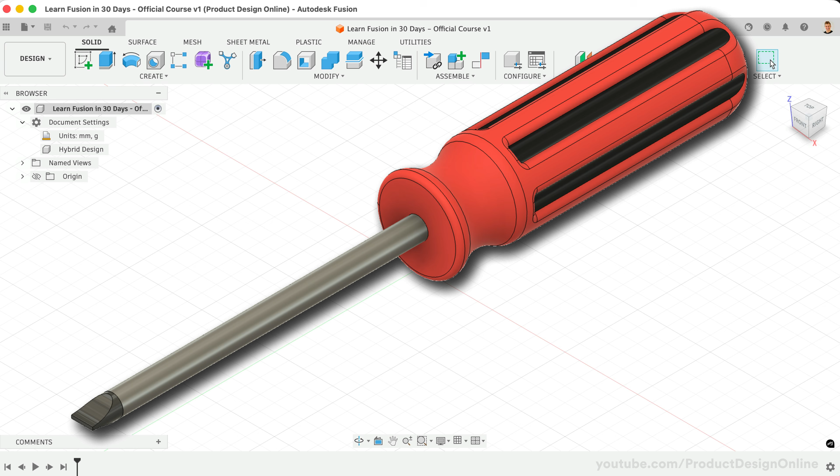Welcome to day number 12 of Learn Fusion in 30 days. Today, you'll create a flathead screwdriver as you learn the 3-point arc command, circular pattern, and more.

Let's get started. Start a new design file by choosing the hybrid design intent and save your design. Use hybrid because our screwdriver contains one part for the plastic handle and one part for the metal shank.

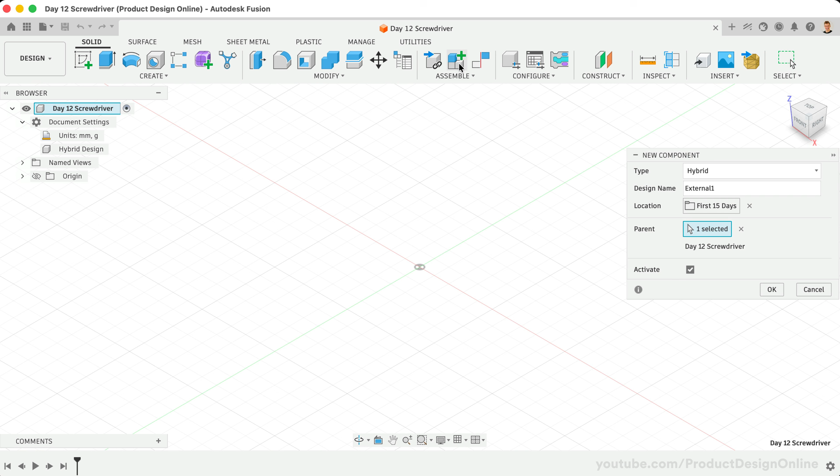Create a new component for each part. Activate New Component from the toolbar. Set the type to Part, as this represents a single manufacturable object. Stick with a standard component and ensure you uncheck External. This creates an internal component that lives only inside this hybrid design file.

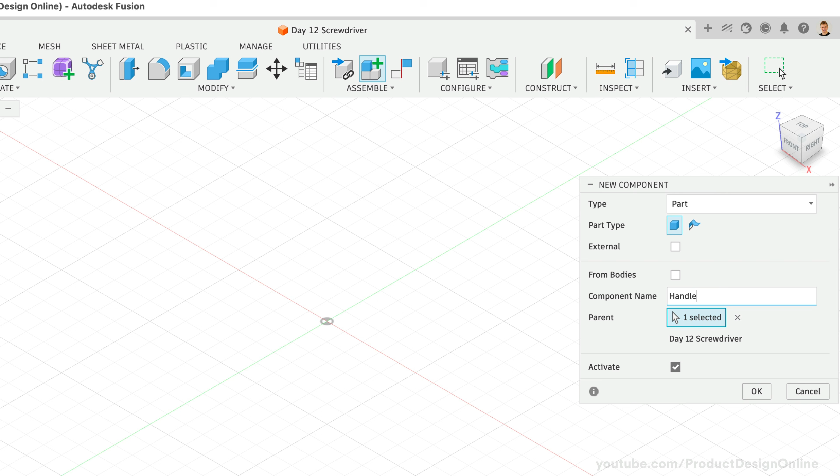Name this first component Handle and click OK. This handle component serves as a container for everything related to the handle part.

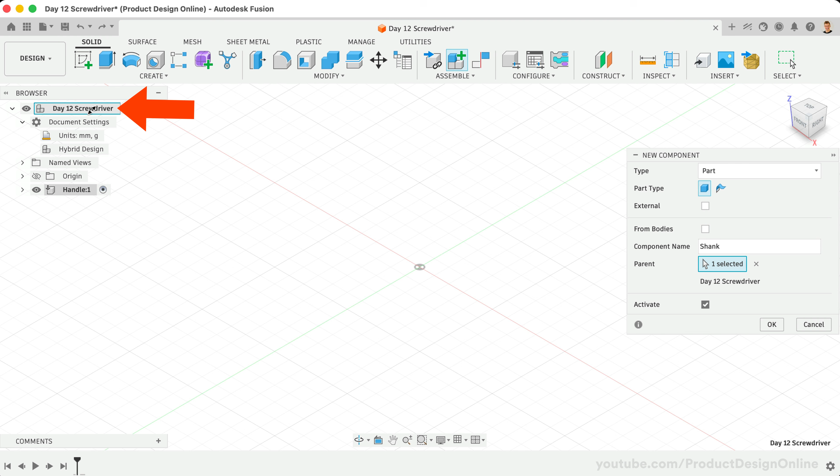Press spacebar to repeat new component and set this one to the part type as well. Name it Shank. Before you click OK, clear out the parent selector. Select the top level or root component to ensure both components are nested at the same hierarchical level in the browser.

Very important, remember to keep a close eye on which component you have active in the browser. The radio button icon next to the component name indicates the active one. Hover over the handle component and click the radio button to activate it.

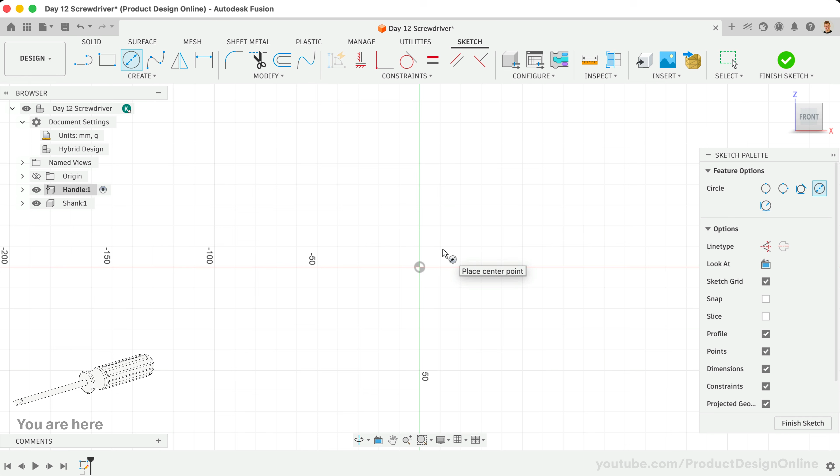Press C for circle and select the XZ origin plane to sketch the handle as if it were lying on a table. Start at the center origin and define the diameter as 28 mm before pressing Enter.

Press E to activate Extrude. Define the length of the handle as 100 mm. Click OK to save the extrude.

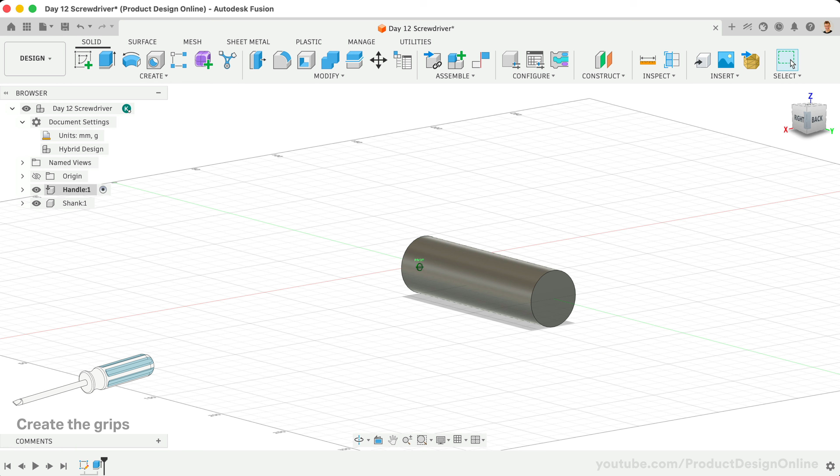To create the grip cutouts, start a new sketch on the back side of the cylinder. Rotate your model, right-click on the back face, and select Create Sketch.

Activate the Circle tool again. Start the center circle anywhere on the edge of the existing cylinder. This automatically applies a coincident constraint. Define the diameter as 6 mm and press Enter. Notice the circle stays constrained to the edge of the existing circle.

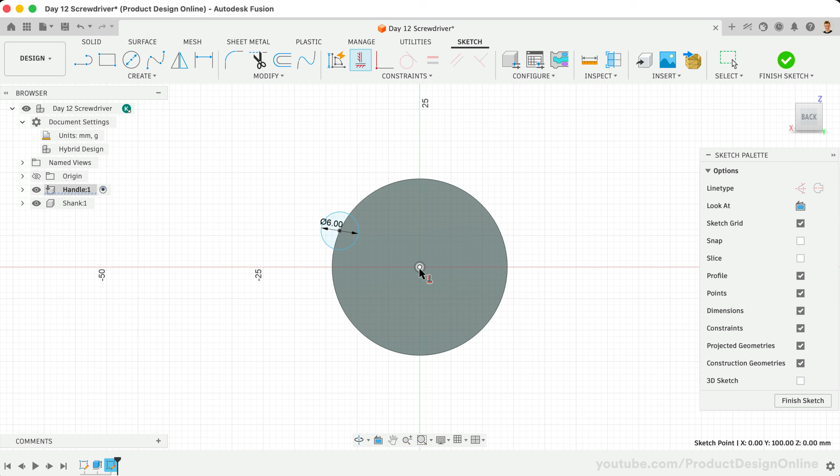Click out in space to clear any selections. Activate the horizontal constraint. Select the origin and the center of the circle. This forces it to remain in position and fully defines the sketch.

Let's cut half of the circle out of the existing cylinder. Press E to activate Extrude and select the right half of the circle. Drag the blue directional arrow into the existing 3D body to cut away material. Define the distance as -75 mm and click OK.

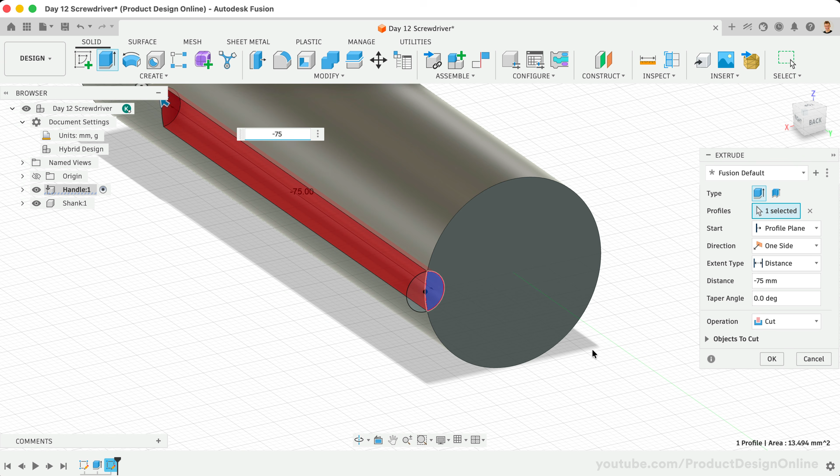This represents the first groove on the handle. As a best practice, keep your sketches simple and manageable. Pattern the feature instead of sketching 5 more circles.

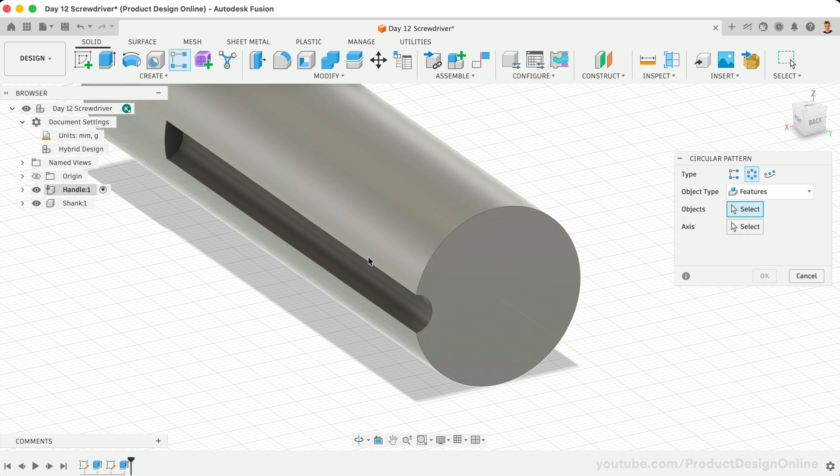Activate the rectangular pattern tool in the toolbar and switch to the circular type. Very important, be sure to activate the solid pattern tool and not the sketch pattern tool. Set the object type to features. This allows you to select the extrude in the parametric timeline as the object to pattern.

Switch to the axis selector. Because you started the handle from the center origin, you can leverage the center Y-axis that runs through the cylinder. Very important, our handle component includes its own origin. Toggle open the origin folder and select the correct Y-axis nested in this part. This ensures the part never loses reference.

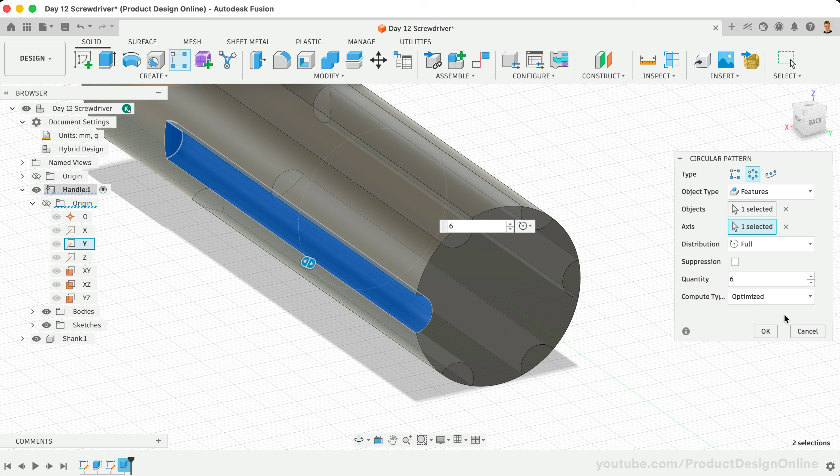Leave the distribution set to full and define the quantity as 6. Change the compute type to Optimize to ensure the fastest processing, and click OK to save it.

Before we round over the sharp edges, add the thumb rest on the front of the handle. The YZ origin plane splits the handle down the middle. Right-click on the YZ plane in the browser and select Create Sketch. This allows you to sketch the side profile and revolve it around the center axis later.

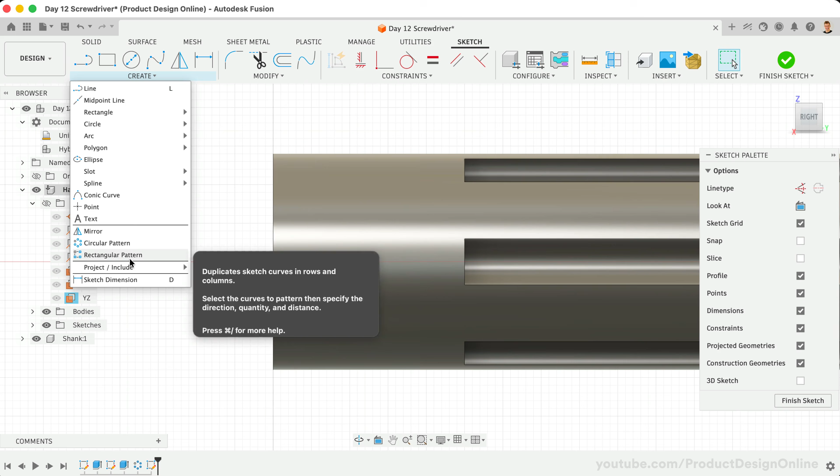To sketch the 3-point arc at the top edge, use the Intersect command first to reference the existing edge. Activate the Intersect tool.

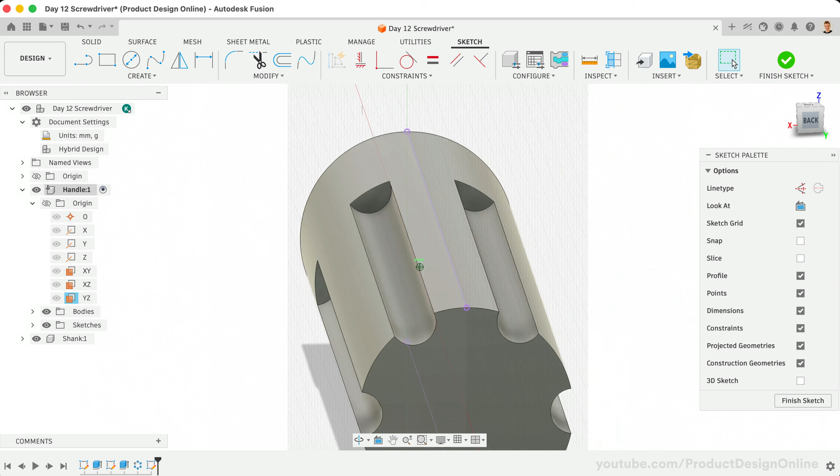Select the 3D body, ensure you check Projection Link, and click OK. Remember, this creates purple geometry where our active sketch intersects the existing 3D body. This edge will automatically adapt if you change the size of the handle.

Activate the 3-point arc command from the Create menu within the Arc flyout menu. The 3-point arc requires you to define the starting point, the end point, and the radius of the arc. Click to place the starting point anywhere on the projected line, and click again to place the end point. Click a third time to place the radius.

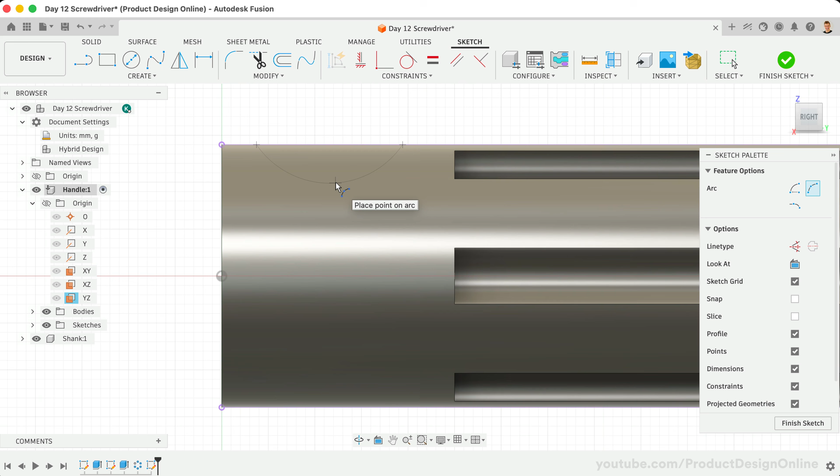Let's now activate the Sketch Dimension tool to dimension the arc. Select the corner projected edge and then the start of the arc. Click to place the dimension and define it as 3 mm. With the Dimension tool still active, select the arc and define the radius as 13 mm.

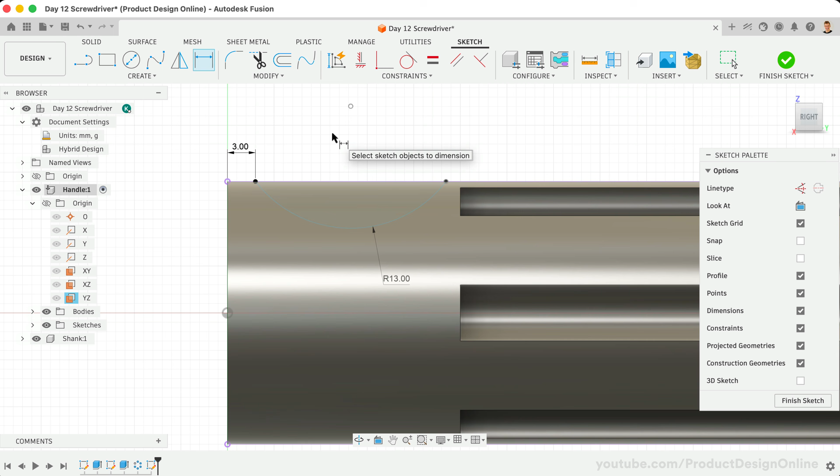Notice the sketch is not yet fully defined as the center point can still move freely. Add a final dimension between the corner projected edge and the center point. Click to place the dimension to the left and define it as 9 mm. This fully defines the sketch and prevents the arc from moving.

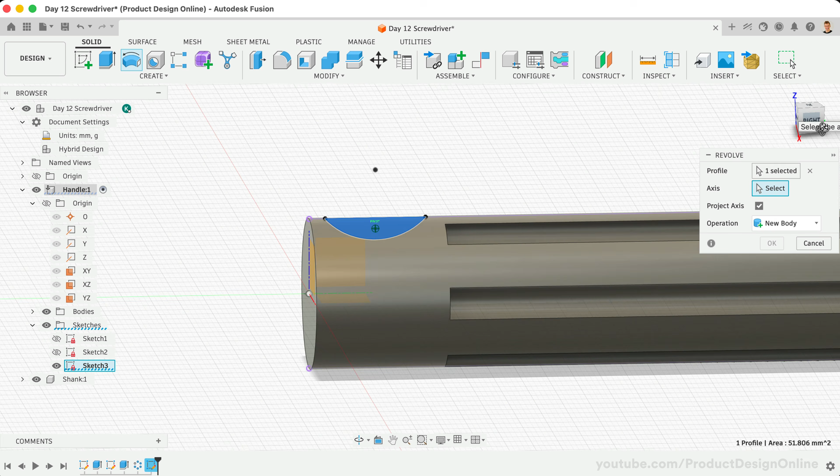Activate the Revolve tool from the Solid tab. Revolve automatically selects the single sketch profile. For the axis, select the y-axis nested inside the handle component, as this runs directly down the center of the handle. The operation defaults to cut since it detects the 3D body. Click OK to save it.

Throughout the design process, you will often want to alter dimensions. Intentionally built parametric designs allow you to simply edit sketches or features to change the dimensions without breaking the design.

Double-click the third sketch in the timeline and double-click the radius dimension to edit it. Change this to 14 mm and press Enter.

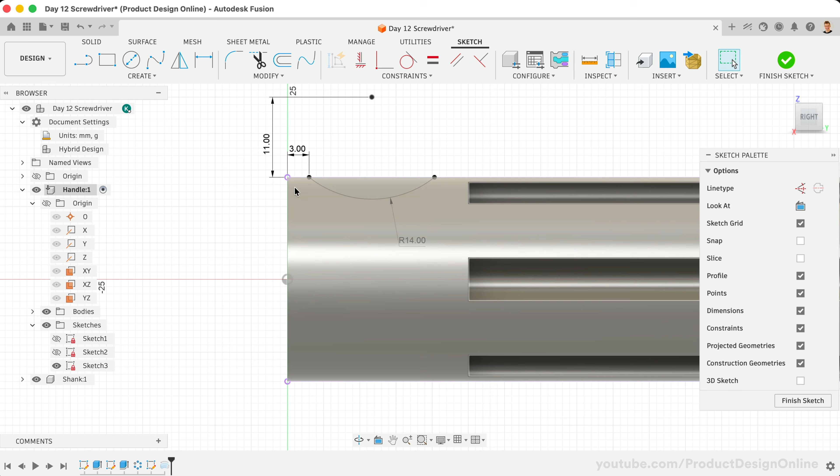Double-click the 9 mm dimension and change it to 11 mm. This makes the thumb rest more shallow. Once complete, select Finish Sketch to exit the sketch.

It's a best practice to keep fillets at the end of your timeline. This optimizes processing performance and prevents lost references or broken geometry that can occur at the edges. Let's first add the cutout for the shank.

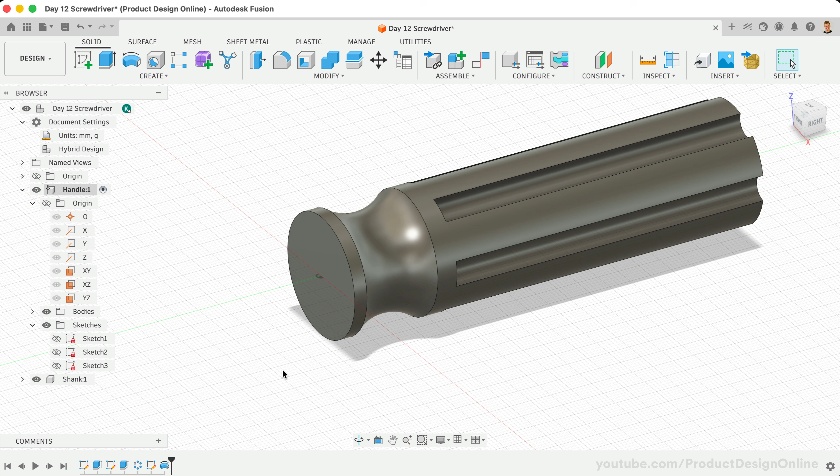Press C to activate Circle and select the front face of the handle to start the sketch. Start at the center origin and define the circle as 7 mm before pressing Enter. Press E to activate Extrude and extrude this to a depth of -50 mm. The minus symbol ensures this cuts into the handle 3D body.

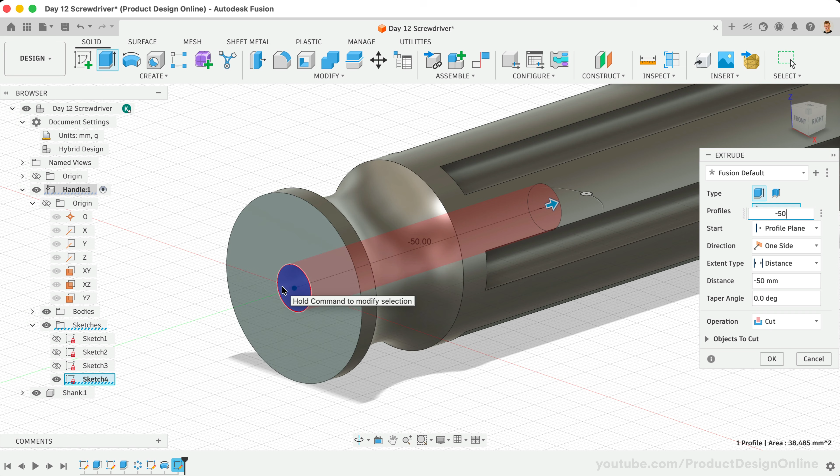Before proceeding, take a minute to rename your sketches in the browser. Click once to select a sketch and a second time to edit the name. Make the names descriptive of the task or design feature. This best practice pays dividends when you reopen old files or continue to work on multi-part designs.

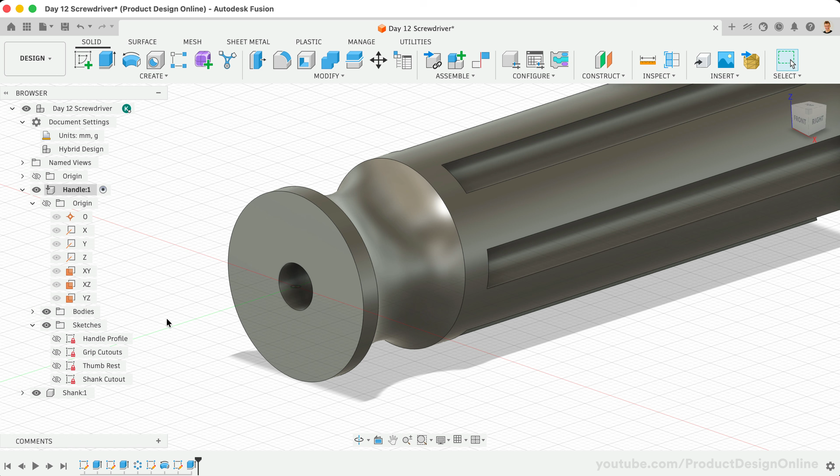Now activate the Fillet command to round the sharp edges. Select the two edges of our thumb rest and define this as 5 mm.

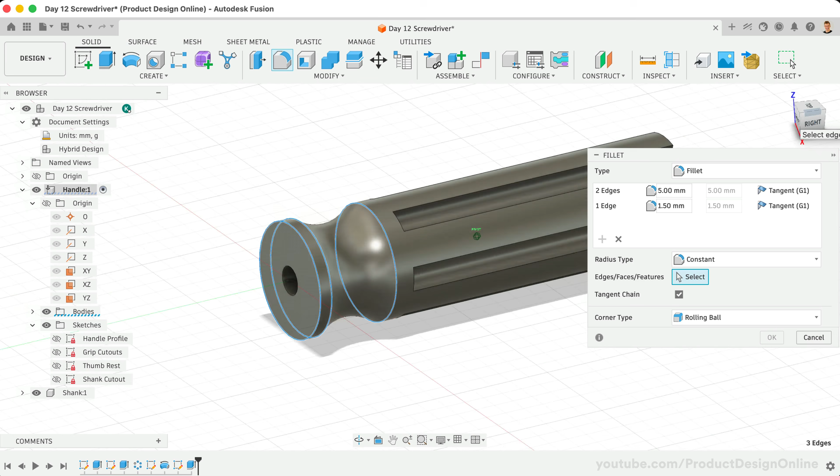Add a new selection set and select the front edge. Define this as 1.5 mm. Add a third selection set and select the back 6 edges of the handle. Once selected, define this radius as 10 mm to create a large rounded end.

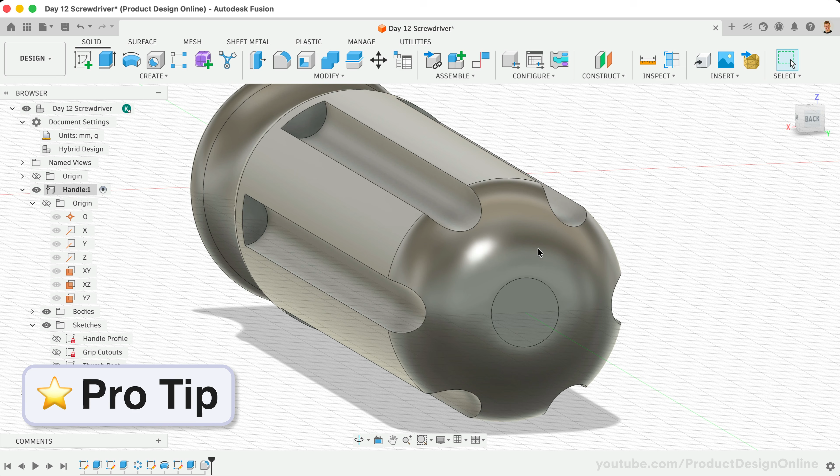Click OK to save these fillets. Here's a pro tip: when applying many different fillet radii, break them into 2 separate fillet commands. This often helps the fillets compute better and makes them more manageable.

Activate Fillet again. In this case, you can select the long edges in a single click since the previous fillet connects the edges. Select all 6 long edges and define the radius as 2 mm.

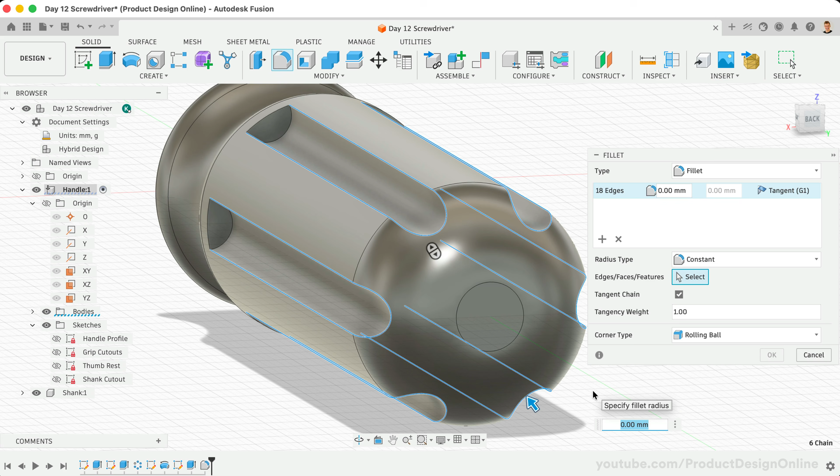Add a new selection set and select the arc and short outer edge. Repeat this for the remaining 5 cutouts.

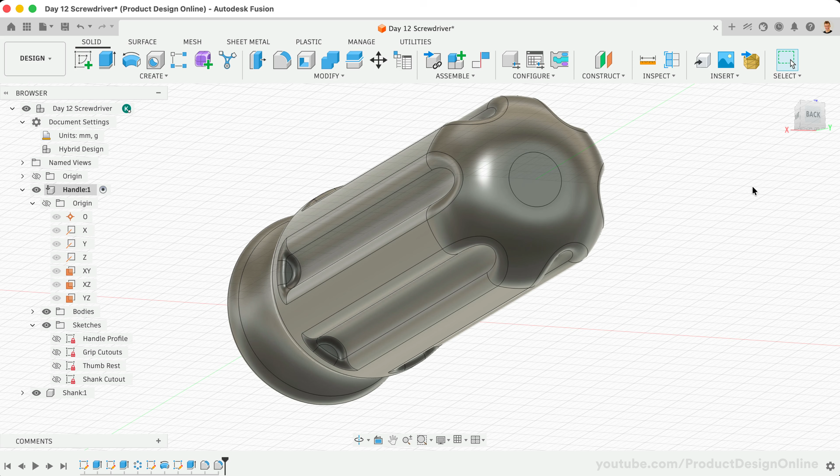Define this fillet radius as 1 millimeter and click OK. This completes the handle. Click Home to reset the view.

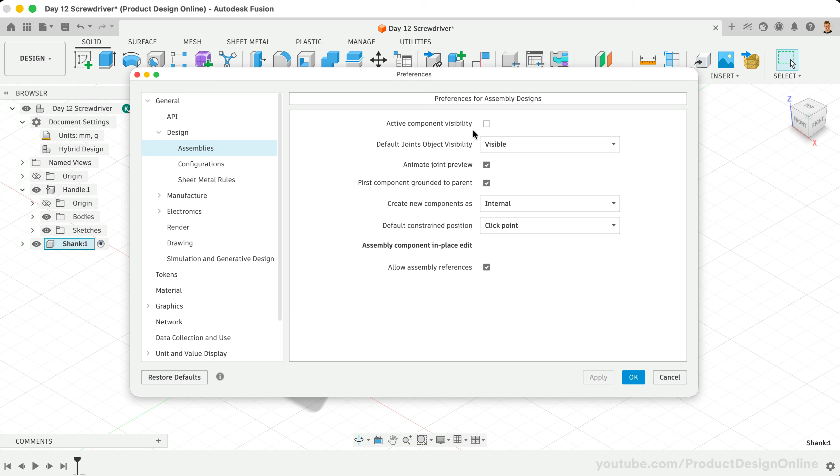Very important, remember to activate the shank component before creating the shank. This ensures the sketches and bodies nest inside the correct part. You can also close the Origin and Sketches folder of the handle component. Don't forget, on day 11, you turned off active component visibility, so each component remains opaque.

To create the shank, you could technically extrude the existing face of the circle. However, if you reference a face directly and then significantly modify or delete the original geometry, the dependent feature often loses its anchor. This results in errors and broken links in your timeline.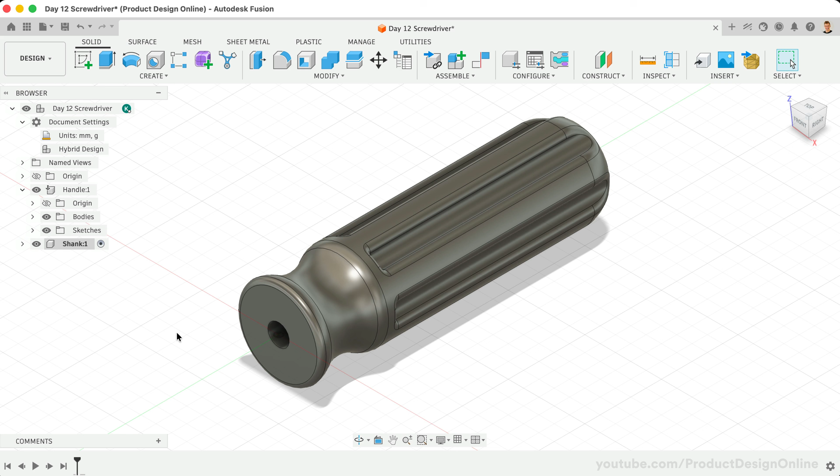View the model from the front position to right-click on the circular face and select Create Sketch. Activate the Intersect tool. Once active, select the inside circular face and click OK. This ensures the geometry of our shank always matches the handle cutout.

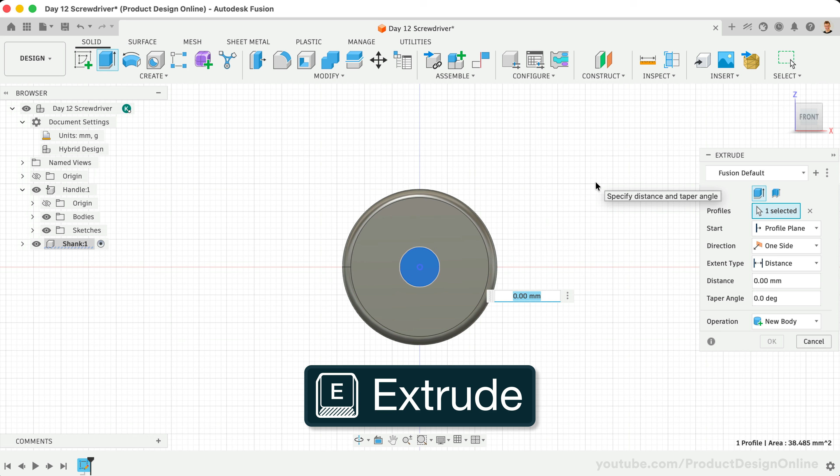Activate Extrude and define the distance as 150 millimeters. As a best practice, always test your parametric designs as you go.

Activate the handle component and edit the fourth sketch, which contains the shank cutout. Double-click the dimensions to edit and enter a new value. When you select Finish Sketch, the shank automatically adapts in size.

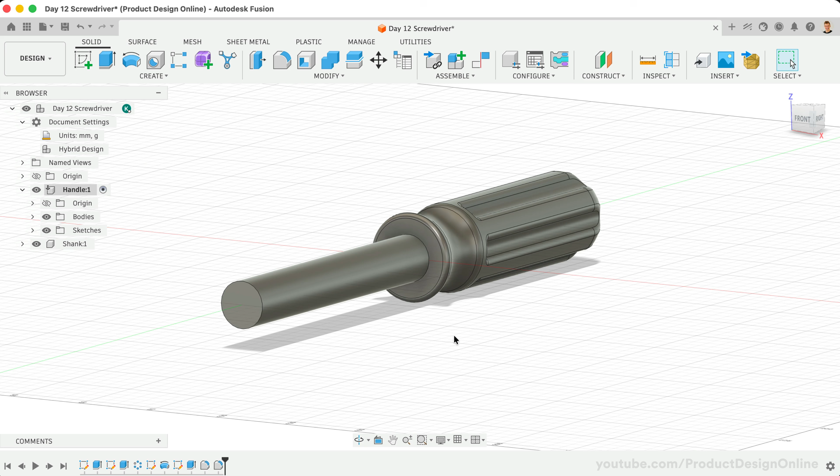Again, you could achieve this by extruding that face. However, the Intersect command builds in more intelligence and ensures you never lose the reference. Press Undo until you return to the 7mm diameter.

Let's finish the design with the screwdriver tip. Create a new component for the tip, which allows you to reuse the handle and shank for different designs.

Here's a pro tip. Right-click on the top level or root component and select New Component. This method remains the preferred choice as it automatically selects the root component as the parent, saving you a few seconds each time. Set this one to the part type as well.

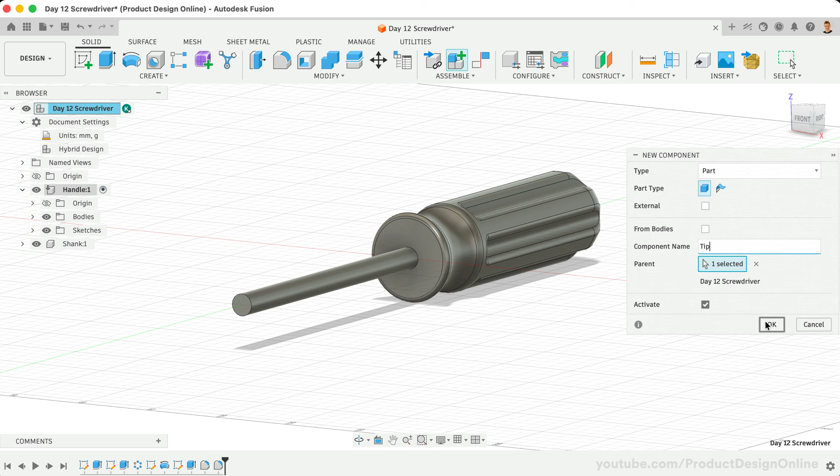Name this component Tip and click OK. Double-check that the tip component is active in the browser.

This time, reference the existing face to create the 3D body without a sketch. Press E for Extrude and select the end of the shank. Define the distance as 10 millimeters.

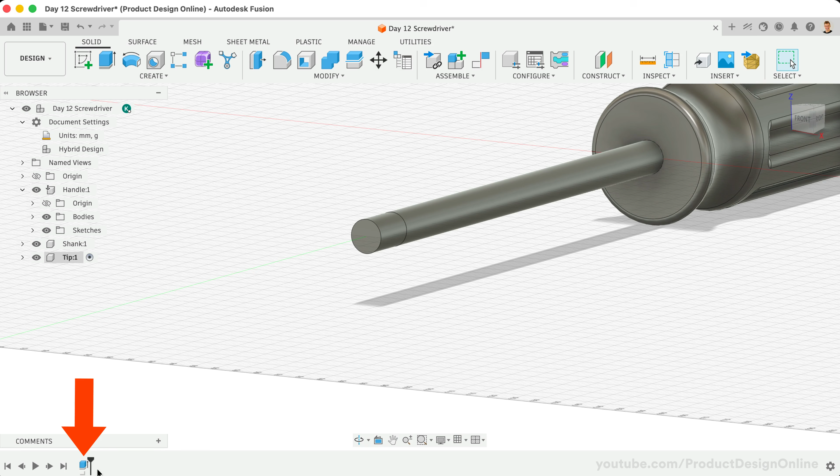The downside is that you only have an extrude in your timeline without a sketch to alter. However, this works fine for simple use cases.

Toggle open the Origin folder for the tip component. Right-click the YZ plane as it runs down the middle and select Create Sketch. Again, use the Intersect tool to reference the existing edges.

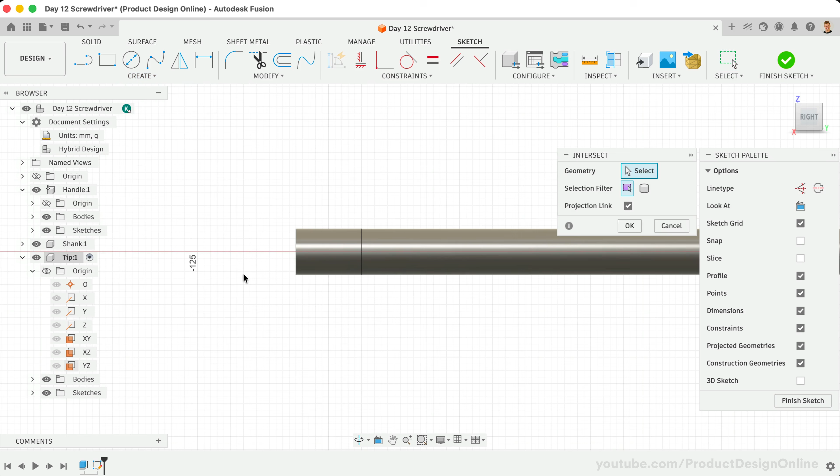Activate the 3-point arc tool. Start the first point near the front edge. For the second point, click where it snaps to the top purple edge. Click anywhere to place the third point. The first endpoint can still move freely.

Activate the coincident constraint and select the endpoint and the front edge. This forces it to remain on the front edge.

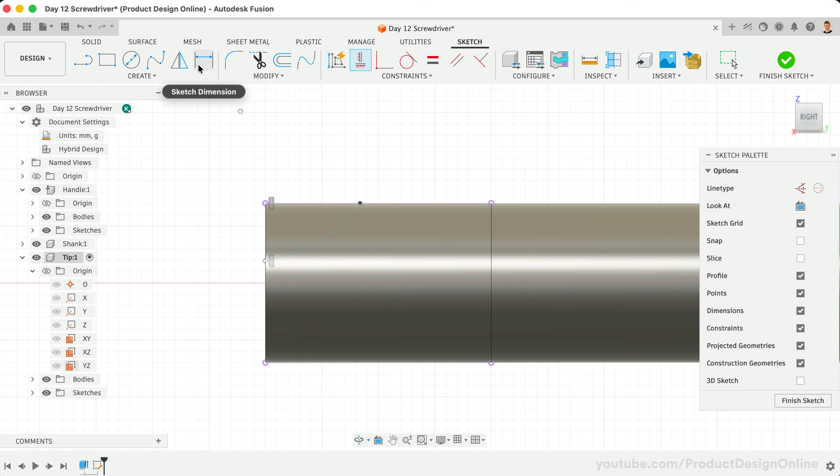Activate Sketch Dimension. Select the center point and the first endpoint of the arc. Click to place the dimension and define it as 0.5 millimeters.

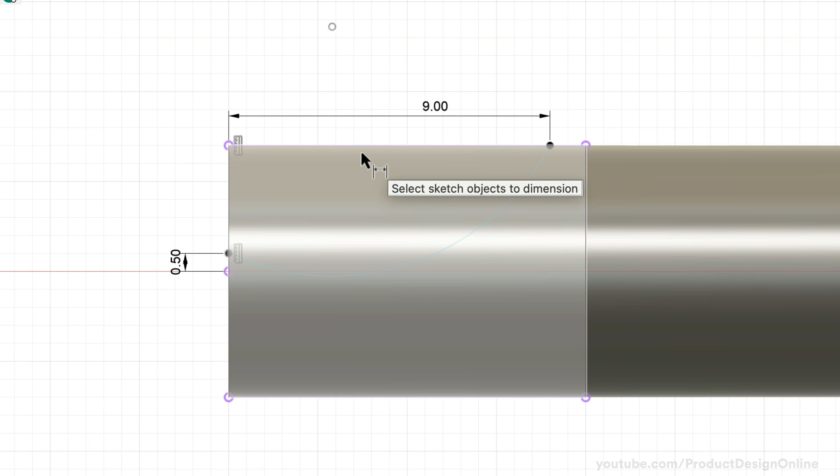Add a dimension between the corner edge and the second point of the arc. Define this as 9 millimeters. Lastly, add an 18 millimeter radius dimension to the arc.

If you hide the tip body, you will see that you need to fully close the sketch profile. Activate Line and sketch a line between the corner edge and the start of the arc.

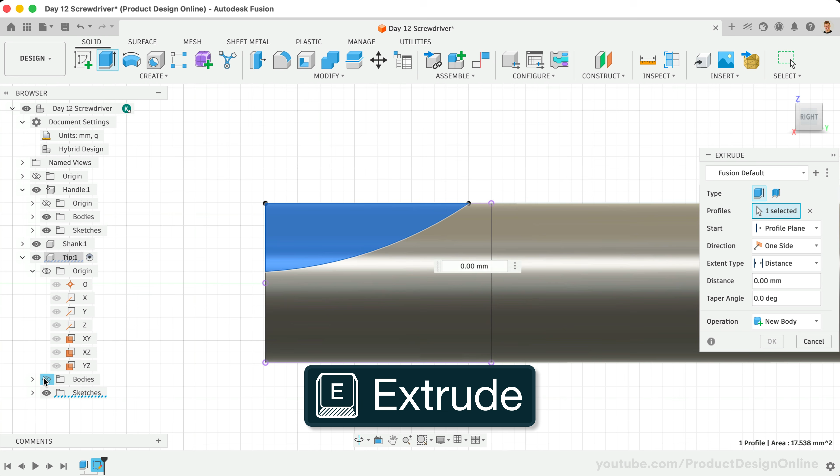Press E for the Extrude command and turn the 3D body back on. Since you sketched in the exact middle, change the direction to symmetric.

Let's build intelligence into the model in case the shank and tip diameter change. Update the extent type to all. This ensures the tool always cuts all the way through the existing 3D body.

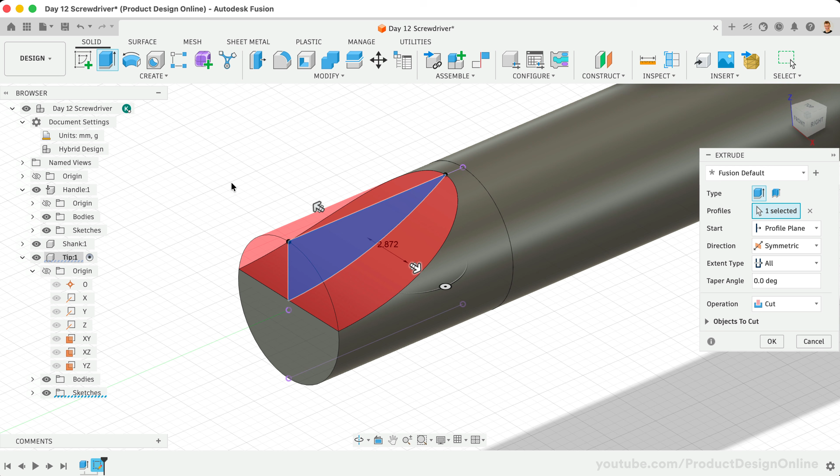Click OK to save the extrude. Let's now mirror this to the other side. Activate the Solid Mirror tool.

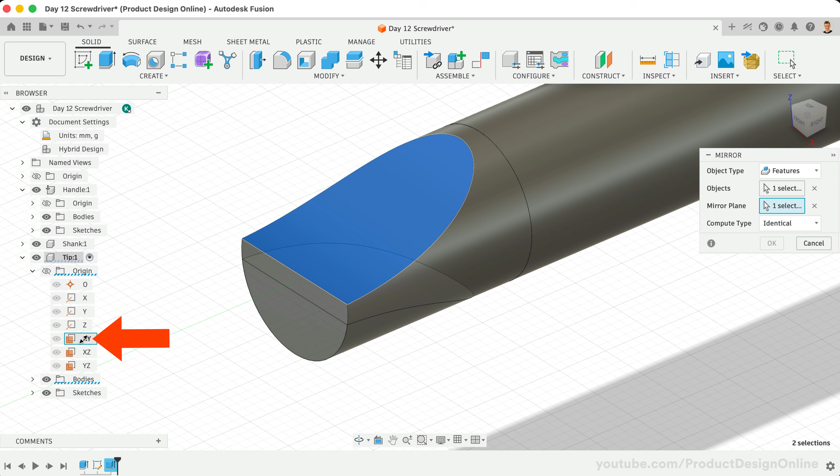Use the Features object type and select the extrude in the timeline. Switch to the mirror plane selector and select the XY origin plane inside the tip component. Once again, use the Optimize option for the fastest performance and click OK.

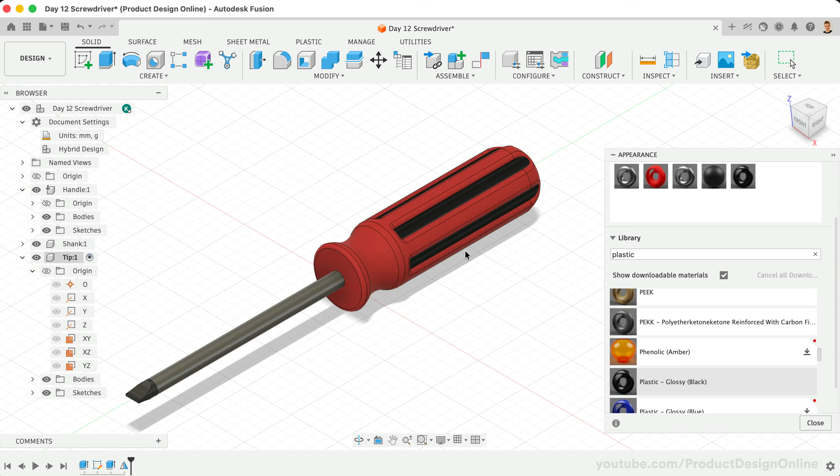The screwdriver model offers a fun opportunity to experiment with appearances. Have fun trying different plastic appearances on the handle, and remember, you can apply appearances to individual faces. Great job completing the screwdriver.